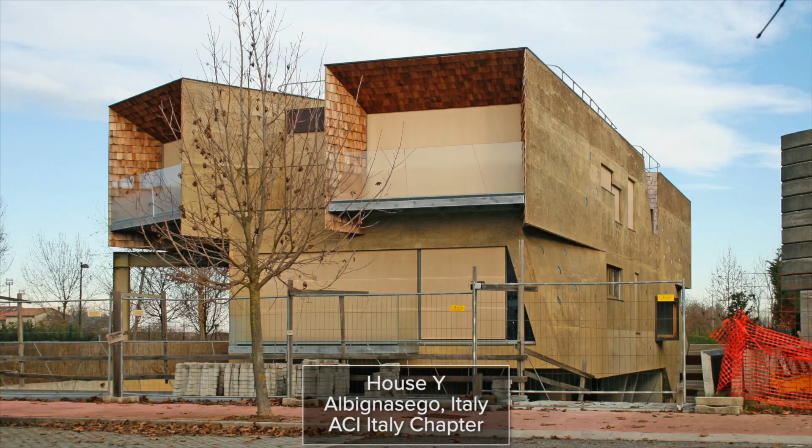Here are the winners. The second place award for the low-rise category goes to Infinity House. This entry was nominated by the ACI Philippines chapter.

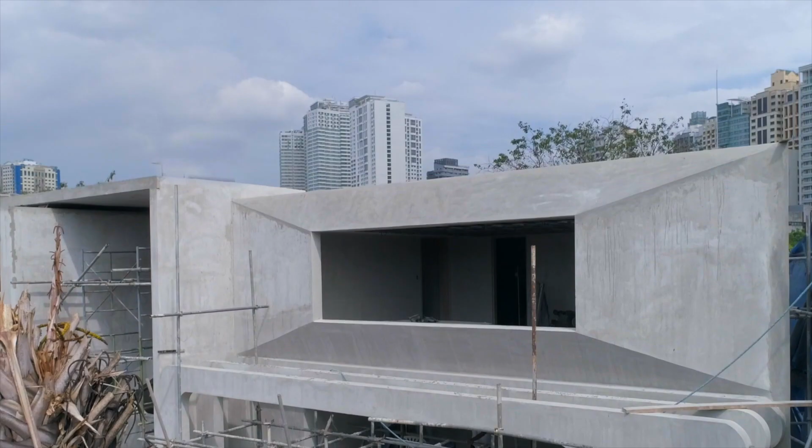Residing in Metro Manila, Philippines is the Infinity House. The project is viewed as a living kinetic sculpture and an example of architecture and exuberance, an ever-changing performance space, merging art, architecture, and great engineering. The heart of the project, its 6-meter deep cantilever concrete space, acts as both a bedroom and a canopy. Due to the prevalence of earthquakes and typhoons in the Philippines, concrete was chosen due to its strength and ability to resist natural forces, resulting in Infinity House being both a resilient and sustainable structure.

And the first place winner of the low-rise category is the Arkansas Museum of Fine Arts. This project was nominated by the ACI Arkansas chapter.

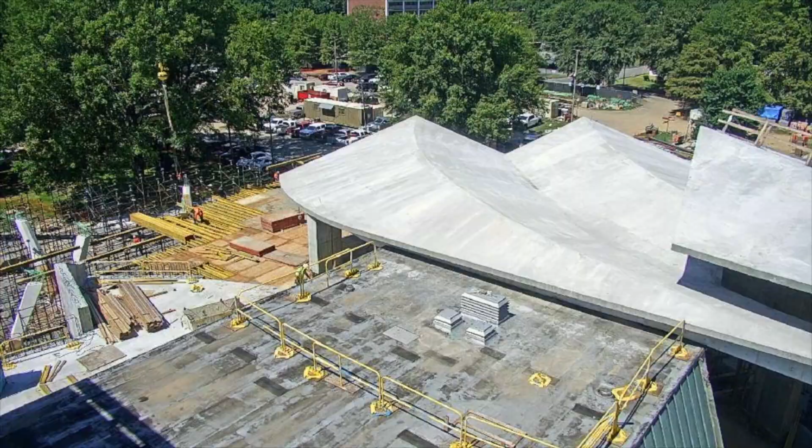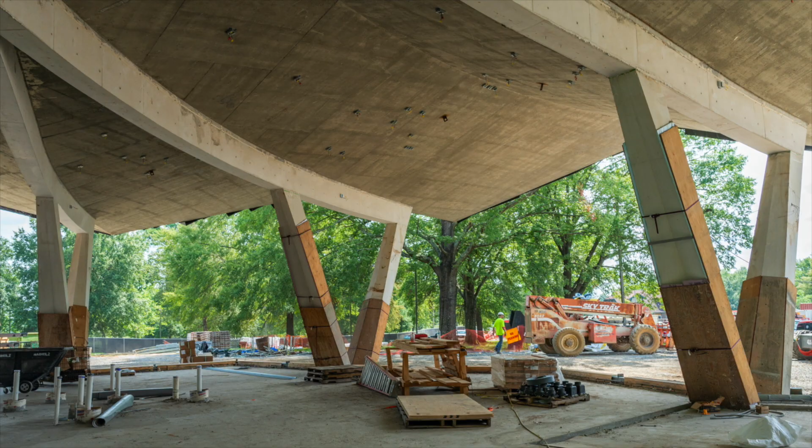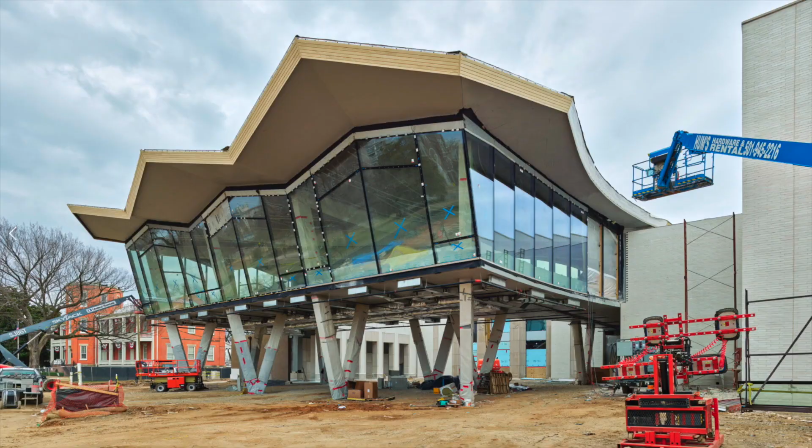Stationed in Arkansas, USA, the Arkansas Museum of Fine Arts, formerly known as the Arkansas Arts Center, is a 133,000 square foot space that blends elements of the original 1937 Art Deco structure, which serves as an entrance to the museum, with stunning contemporary design. Its signature roof, a flowing folded plate concrete structure, blossoms to the north and south. Below the roof is a custom curtain wall system that allows for breathtaking views of MacArthur Park.

Our next category is the mid-rise structure category. These are structures between 4 and 15 stories tall. Let's take a look at the entries.

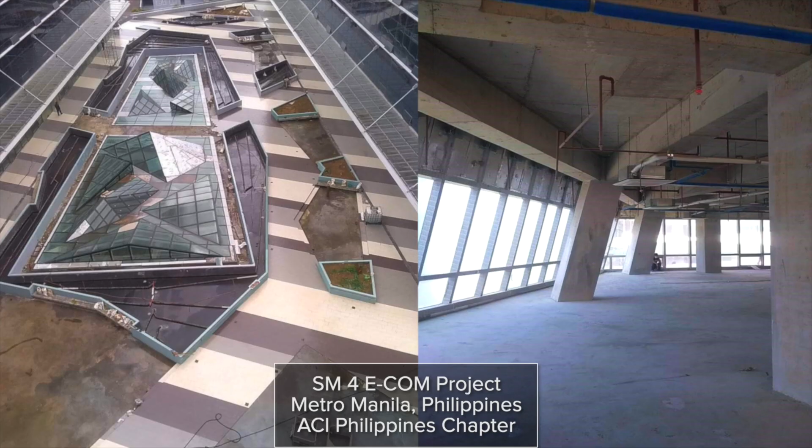Now let's move to the winners. The second place winner of the mid-rise category is the Center for Culture, Arts, and Design in Aquitaine. This project was nominated by the ACI Paris chapter.

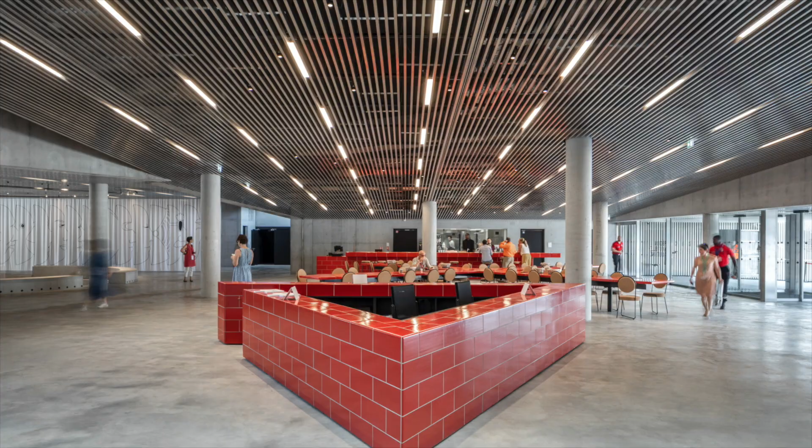Residing in the heart of Bordeaux, France, is the Center for Culture, Arts, and Design in Aquitaine. The center houses together 3 agencies for contemporary art, literature, cinema, and performing arts. The building is conceived as a single loop of cultural institutions, extruding the pavement of the promenade to become the ramp that leads into the urban living room, the facade with glimpses into stage, towers, and offices, and the rooftop enclosing the sky-lit galleries.

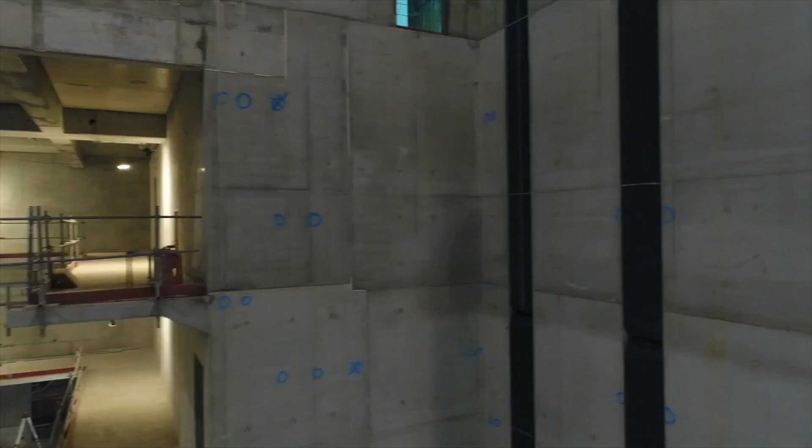And the first place winner of the mid-rise category is the Deichman Bjørvika. The project was nominated by the Norwegian Concrete Association.

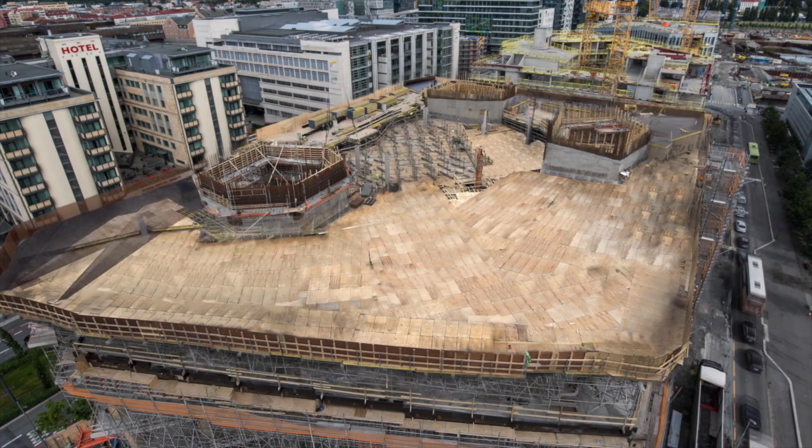Located in Oslo, the capital of Norway, is Deichman Bjørvika. The new library opened in 2020 after 6 years of construction and has been extremely well received for its design. The cantilevered floors are suspended from the geometric concrete roof, providing structural strength to the project. The concrete structures around the light shafts and in the folded roof are lasting elements that give the building a permanent and recognizable quality for visitors.

Up next is the high-rise structure category. These are structures that are over 15 stories tall. Let's take a look at the entries.

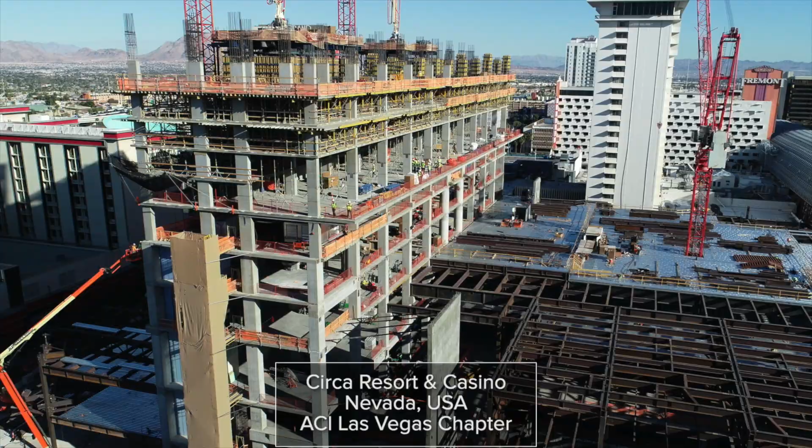And here are the winners. The second place winner for the high-rise category is the Statue of Belief. This project was nominated by the ACI India chapter.

Located in Rajasthan, India, and standing over 350 feet in height, the Statue of Belief is the world's tallest Shiva statue and the fourth tallest statue in the world, constructed with structural steel and ultra-high performance concrete. The statue was designed to have all details, expressions, and features formed in shell concrete. On completion, the statue was metallized with zinc and copper to provide a protective coating over the statue to achieve its expected lifespan of 250 years.

Found in the city of Sao Paulo, Brazil, is the Leopoldo 1201. The residential building's main feature is its 100% architectural concrete facades, with emphasis on volumetry and biophilic design of its terraces. Slatted wood texture was applied to the architectural concrete, which created a challenge to the structural design and development of the concrete mix, but guaranteed the execution of fidelity to the architectural project.

Before we continue with the show, we would like to take a moment to recognize two individuals who are receiving ACI awards for their outstanding contributions to the concrete industry.

Chris A. Forrester is being awarded the Roger H. Corbetta Concrete Constructor Award for his outstanding contributions in the field of safety, productivity, and constructability in concrete construction. Michael M. Sprinkle is being awarded the Charles S. Whitney Medal in recognition of over 50 years of outstanding applied research and leadership toward the protection, repair, and rehabilitation of concrete structures.

Congratulations to both of them. Our industry would not be where it is today without the contributions of these two amazing individuals.

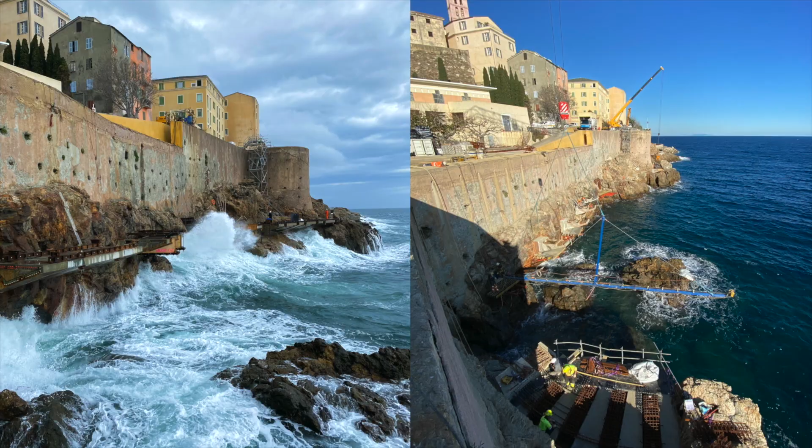And here are the winners. Second place goes to Intel MLCP, or Multi-Level Car Park. This project was nominated by the ACI India chapter.

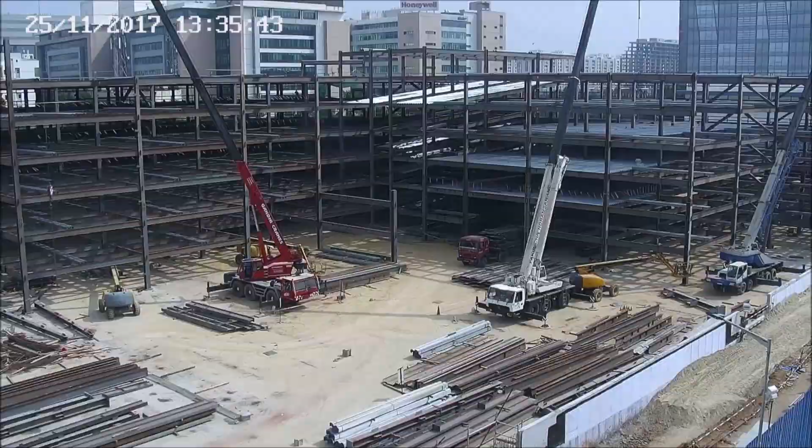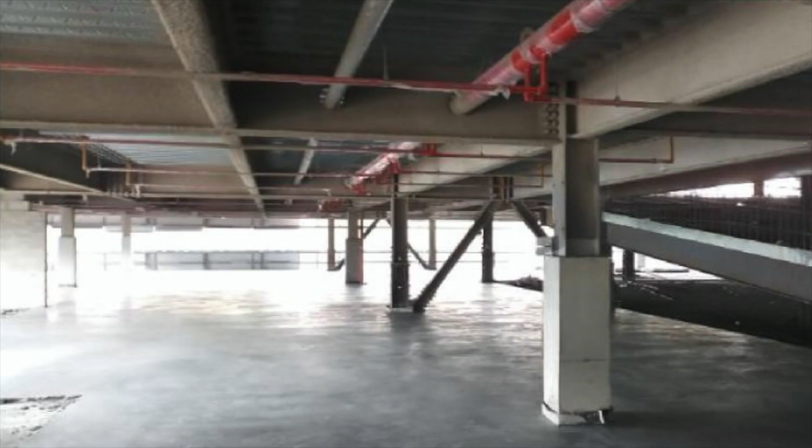And the first place winner of the concrete flatwork category is the Aldilonda Promenade around Bastia Fortress. This project was nominated by the ACI Paris chapter.

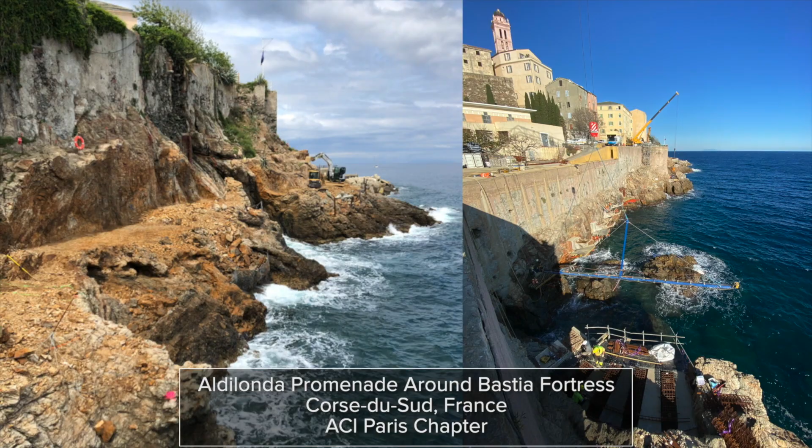Found in Corse-du-Sud, France, the Aldilonda Promenade around Bastia's fortress consists of a walkway for pedestrians and cyclists circumventing the citadel. Below the historical citadel and its ramparts is a pathway that embraces the meandering of the coast, following its contours, and allows the pedestrians a direct contact with the rocky cliff. Moreover, by slotting elegantly into the site and by enhancing this reunion, it becomes the project's main asset, in the sense that the walkway does not create a new place, but rather makes what is already there accessible to everyone.

And up next is the decorative concrete category. Now let's take a look at the projects.

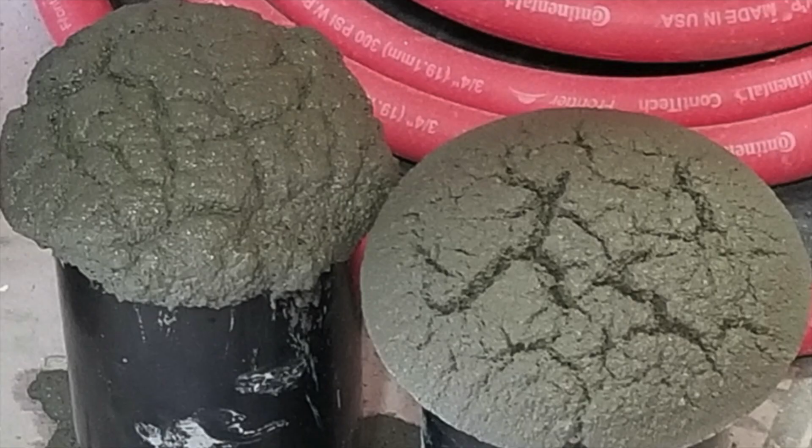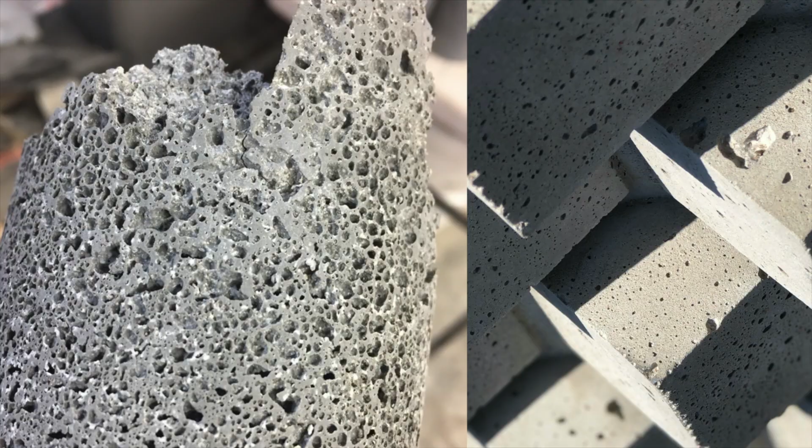Stationed in Oklahoma, USA, the acoustically diffuse and absorbent lightweight aerated concrete, or ADALAC, is characterized by its built environments which reflect, diffuse, and absorb frequencies prior to oral reception and comprehension. This project showcases research and development of fabricated prototypical concrete panels by manipulating ingredients and form, yielding acoustical properties conducive to speech frequencies.

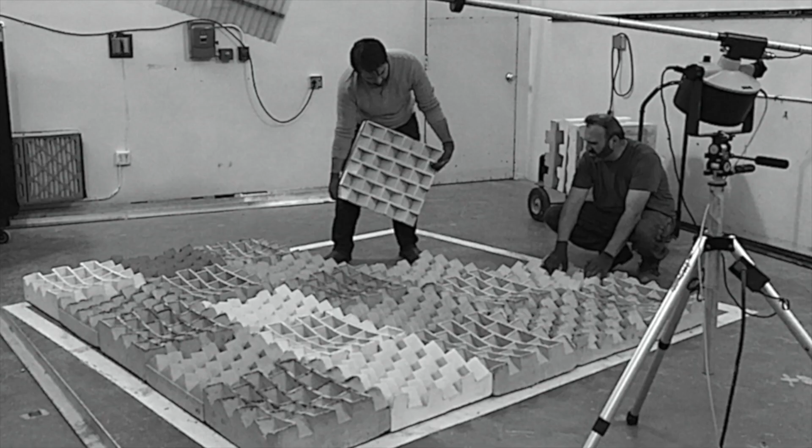And the first place winner of the decorative concrete category is the Cave That Traveled. This project was nominated by the ACI India chapter.

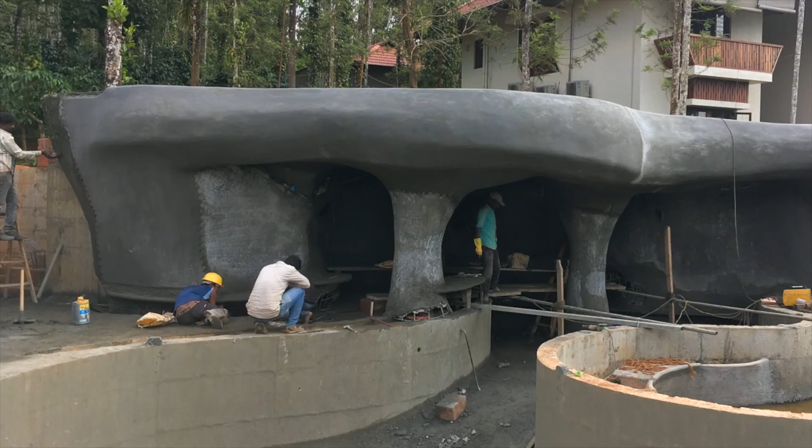Residing in Kerala, India, the Cave That Traveled was imagined as an experiential sculpture in the form of a pavilion and deck of a swimming pool. The character of the ferro cement shell as a cave is emphasized by the continuity of the fascia, the soffit, the wall, the seats, and the floor, which flows seamlessly as one continuous surface, indistinguishable from one another. Ferro cement was the material of choice owing to the possible fluidity of form and the ability to design the morphed surface before casting.

And now the infrastructure category. Here are the entries.

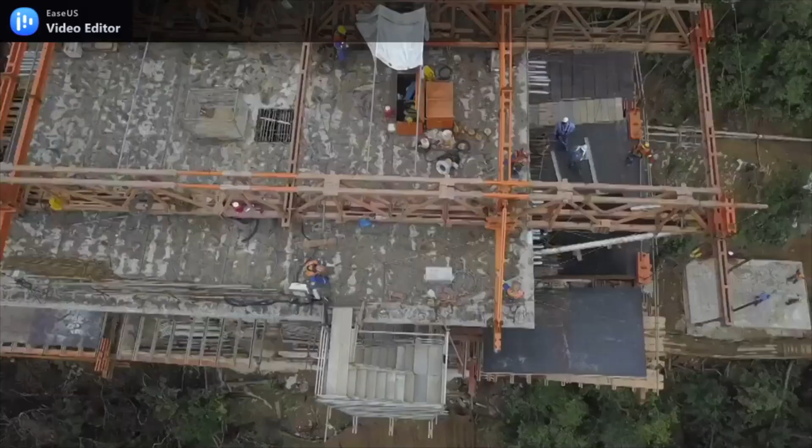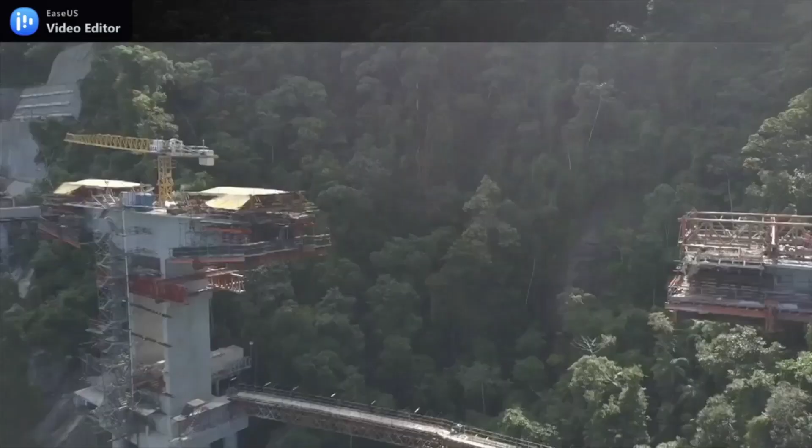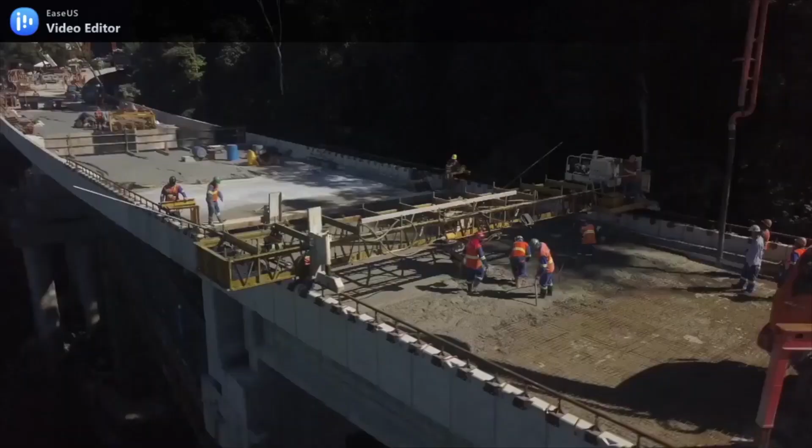Located in Sao Paulo, Brazil, the Tamoios Highway connects the Paraíba Valley to the northern coast of the Sao Paulo state, providing access to a major port and popular summer destination for tourists. The highway duplication along the ridge overcomes 2,400 feet of elevation and passes through the Serra do Mar State Park, which leads to a series of tunnels and viaducts. The Viaduct V3 is located amidst the ridge and has a curved radius of approximately 1,600 feet.

And the first place winner in the infrastructure category is the Darwin Bridges. The project was nominated by the ACI Quebec and Eastern Ontario chapter.

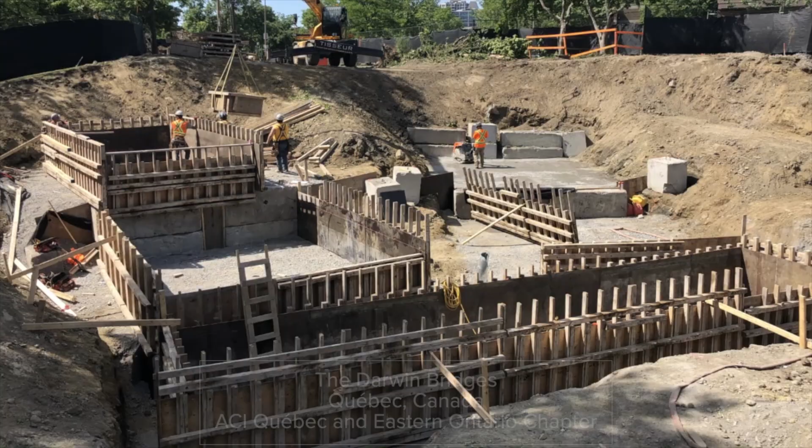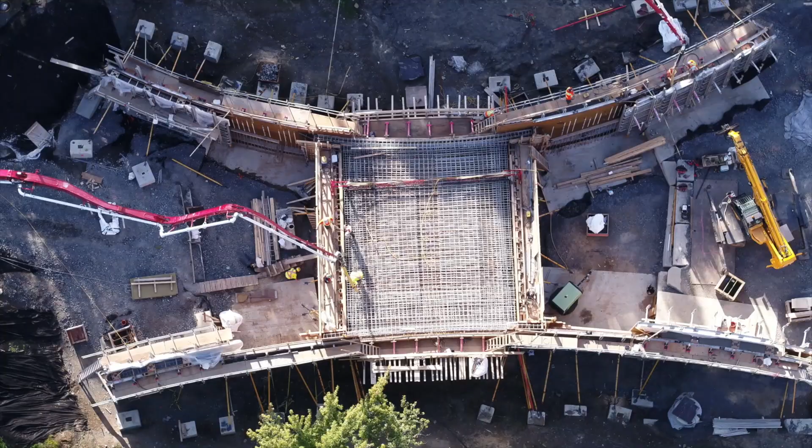Found in Montreal, Canada, and built with reinforced cast-in-place concrete, the Darwin Bridges are used by pedestrians and cyclists alike to cross under the boulevard's busy 4 traffic lanes safely and enter West Vancouver Park. The project utilizes a special type of concrete for its architectural features. They are the first bridges in the world to incorporate glass powder concrete. The use of glass powder as supplementary cementitious material helped reduce the quantity of greenhouse gas released into the atmosphere by 40 tons.

Up next is the repair and restoration category. Here are the entries.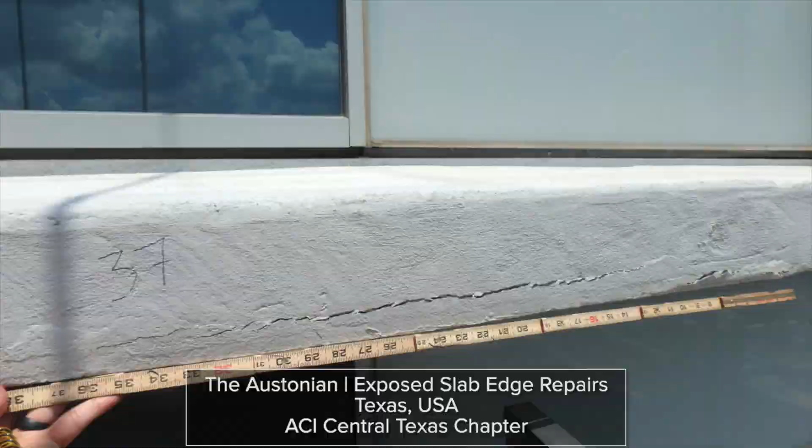And let's see the winners. The second place in the repair and restoration category goes to 225 West Madison. This project was entered by the ACI Arizona chapter.

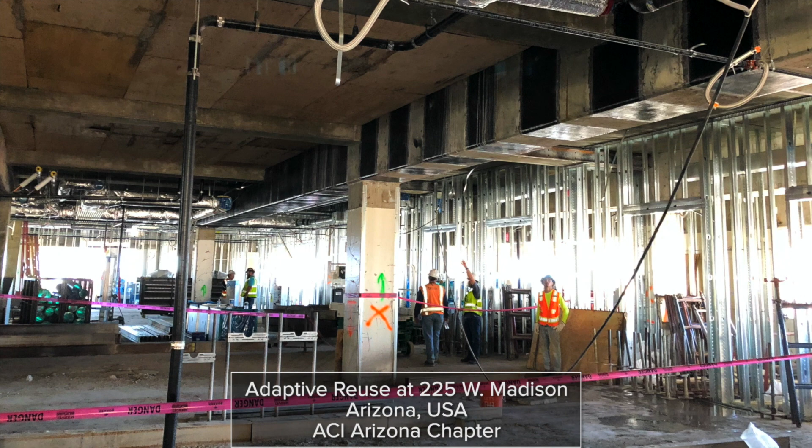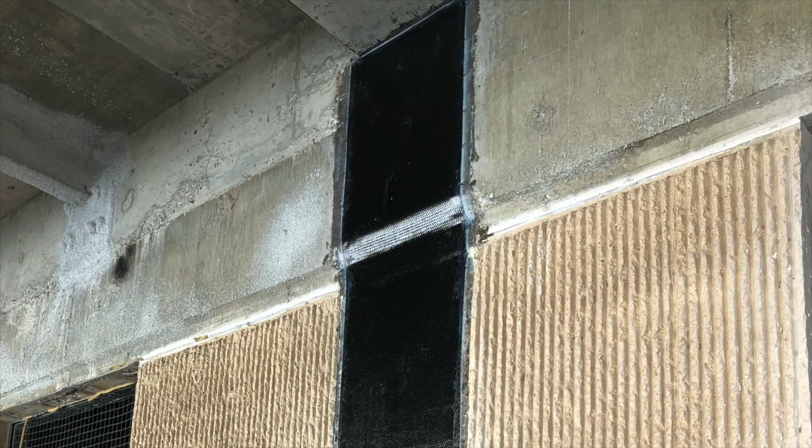Stationed in Arizona, USA, and formerly the Madison Street Jail constructed in 1985, the 225 West Madison project provided the opportunity to resurrect a decommissioned jail facility and repurpose it through adaptive reuse as a Class A office building. The project was able to transform a secure, fortified structure and completely reinvent it as an open, welcoming workspace. By not tearing the building down, the project saved 65 million pounds of concrete and 2.1 million pounds of steel from being wasted.

The first place winner in the repair and restoration category is the Austonian. This project was nominated by the ACI Central Texas chapter.

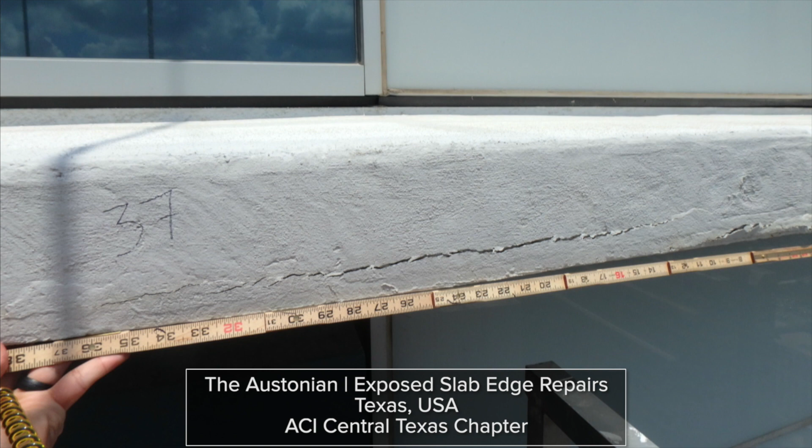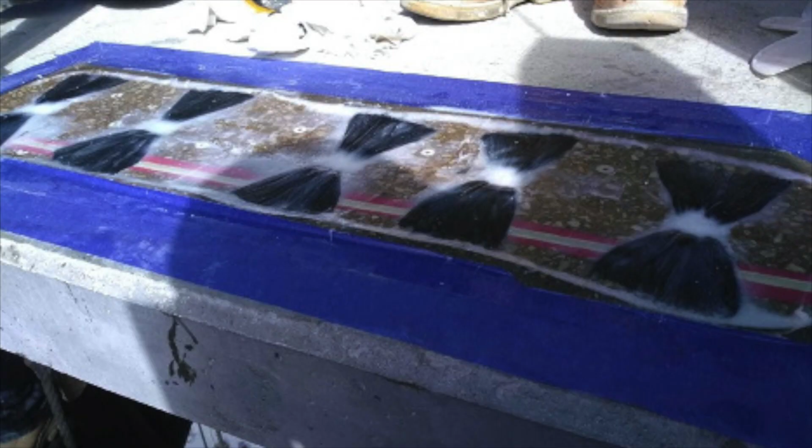Residing in Texas, USA, is the Austonian. The 56-story building experienced a large piece of concrete from a slab edge fall more than 200 feet onto its podium. The repair team used demolition and surface preparation equipment specifically selected to mitigate damage to existing post-tensioned assemblies. Prepackaged concrete repair material was then mixed at balconies near the placement locations to avoid transportation delays. In repairing the project, a 4-step quality control program was also utilized for each of the repaired slab edges.

And now, ladies and gentlemen, it is time to present the highest honor of the show, the overall excellence winner. This is the project that pushes the boundaries of what is possible, what we can build, whether it's innovative design, excellence in workmanship, or unique use of materials. Just like ACI, the overall excellence award winner is always advancing the concrete industry. The 2021 overall excellence award winner is...

The Aldilonda Promenade around Bastia Fortress. This project was nominated by the ACI Paris chapter.

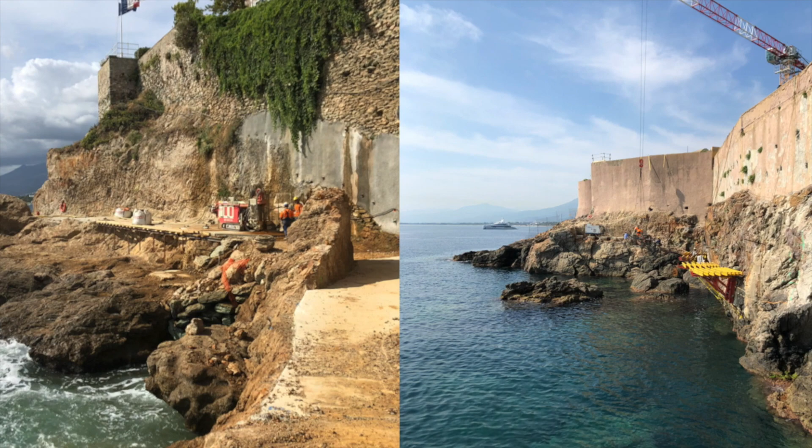Found in Haute-Corse, France, the Aldilonda's promenade around Bastia's fortress consists of a walkway for pedestrians and cyclists circumventing the citadel. Designed as a structural piece of art, the concrete walkway is anchored in the millenary depths of the citadel through 80-foot horizontal piles piercing the rocky sides.

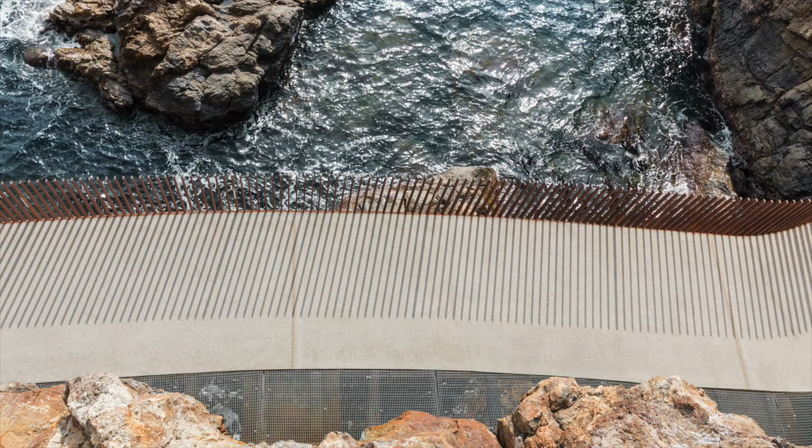The concrete elements hanging on the ramparts required extraordinary technical feats, utilizing a thoughtful blend of prefabricated concrete slabs, smooth, rough, and fair-faced concrete structures. Below the historical citadel and its ramparts is a pathway that embraces the meandering of the coast, following its contours, and allows pedestrians direct contact with the rocky cliff. Moreover, by slotting elegantly into the site and enhancing this reunion, it becomes the project's main asset, in the sense that the walkway does not create a new place, but rather makes what is already there accessible to everyone.

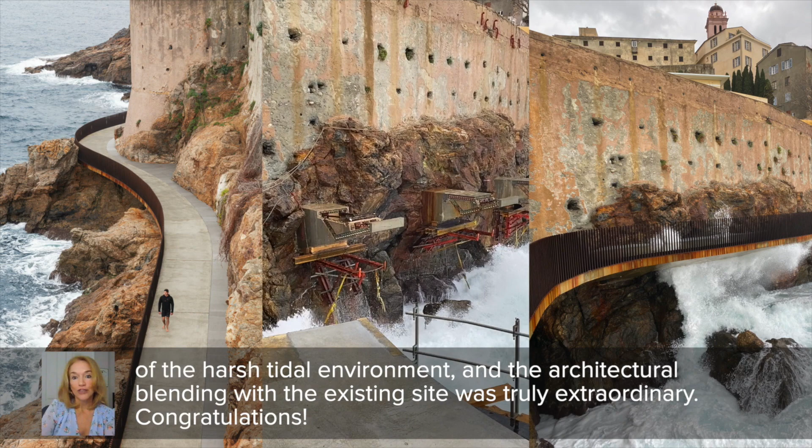Congratulations to the project winners. You demonstrated such a high level of concrete product knowledge. You pulled all levers to mitigate the impacts of the harsh tidal environment, and the architectural blending with the existing site was truly extraordinary. Congratulations.

Now, let's hear from our overall excellence winner.